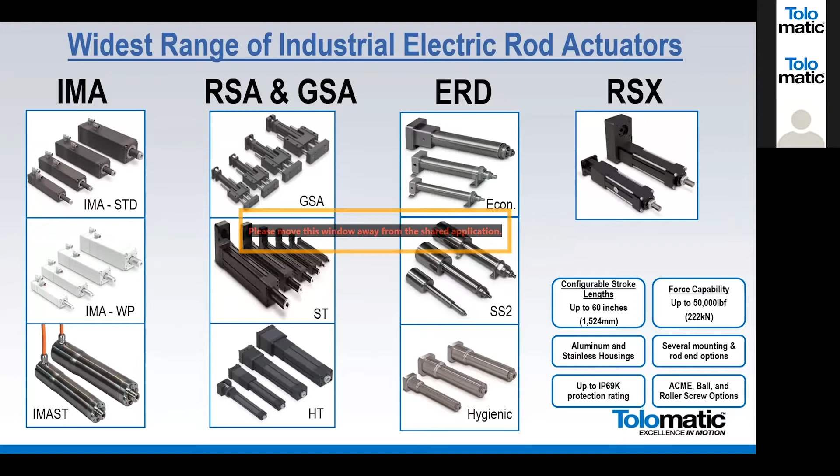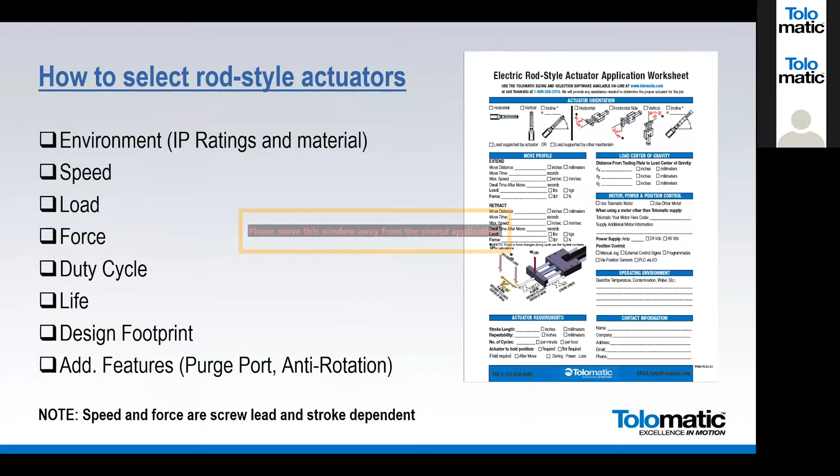RSA series is configurable up to 60 inches of stroke, and the RSA series will also do about 13,000 pounds of thrust, and the larger RSX series up to 50,000 pounds of thrust. So we truly do have an applicable product for hydraulic conversion. Different IP ratings, and of course Acme, ball and Tolomatic roller screw options for the screw technology. Jeff is going to be talking about how to select rod style actuators, and I'll turn this part over to Mr. Brandt.

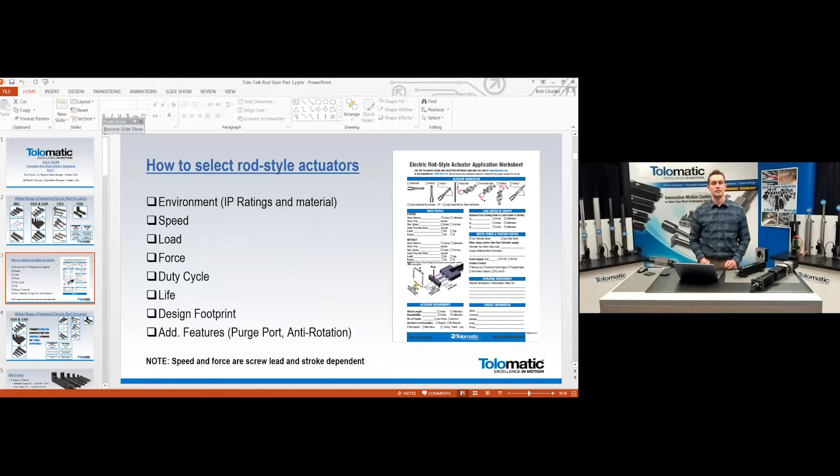Like Bob was saying, there's a lot of things that need to be taken into account when you are selecting your rod style actuator. I know we've gone through some webinars already with this kind of background on selecting an actuator. Please feel free to check those out on our website, the ToloTalks link. But for now, we'll hit the main points here. The biggest determining factor for which rod style actuator you're going to select is probably going to be the environment, looking at the IP ratings and what kind of material the actuator is made out of.

The other thing to consider when you're looking at the actuator is the specs of the peak speed and the maximum thrust capability. Generally, you're not going to be able to achieve both at the same time. So generally with a higher speed, there's a lower force, and vice versa. With a higher force, there's a lower speed. So it's something to take into account, try to figure out that balance. Those will help build your duty cycle, and we can determine from there which actuator will be appropriate for you.

The other thing to consider would be the life expectancy, and we can touch on that a little later on with some of the roller screw options that do lead to a longer life. And then the last thing that I like to make sure of as I'm sizing the application is the design footprint. So how is this going to fit in your system as a whole? And making sure that we're not going beyond any space constraints that you might have in your system.

Yeah, be sure to look also for the Tolomatic sizing helps on the website. We do have some recorded Tolomatic sessions that will help you size actuators, but of course, we're always available to assist with sizing. You can reach out to Jeff or any one of our technical team for assistance in sizing product. We do want to right size the actuator, especially when we're replacing pneumatic or hydraulic applications, as the electric product is more expensive, and we want to be right sized for the app.

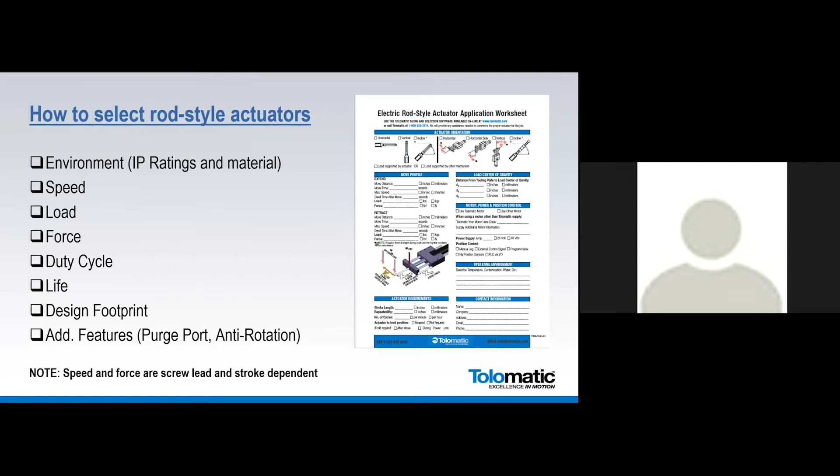So to that point, if you need assistance, this sheet that we have to the right here, the electric rod style actuator application worksheet, is a way to help our team get the information necessary to do a proper sizing. This sheet is available. You can reach out to Tolomatic directly for this, and it's just kind of handy to keep when you're discussing applications with your potential customer there.

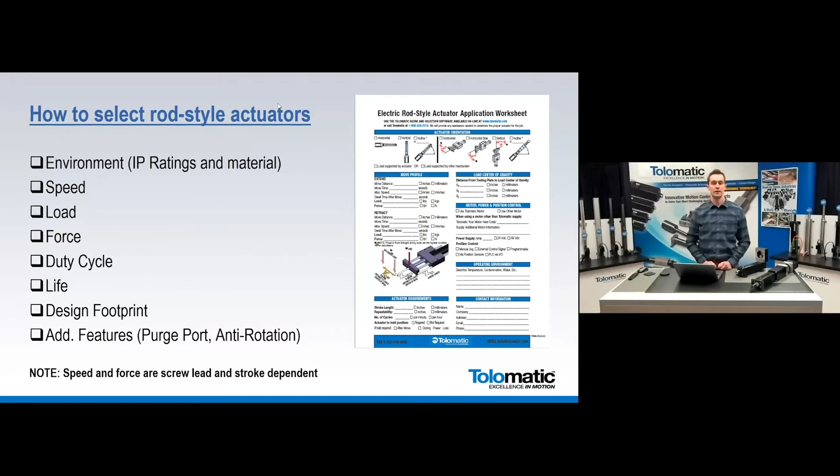And the hope with this worksheet is that, if you do come to a member of our applications engineering team here, where we have a wide support system, everybody should be covered by primary support. And if not, there's always one of us to help back up. And the big thing with the worksheet is if you do come to us, that's the one thing that we ask, is that we have that information from you.

And it also is a handy worksheet to bring along on a sales call. If you're getting into the sales process and starting out, and I guess even for some of the experienced vets, it's a good reminder of making sure that you're hitting all the talking points and covering all the information that we would need. And hopefully, as we can help guide you through the sizing process, maybe it'll make it easier for you on sales calls to start getting a preliminary idea out there as well. Right, it's a great way to be the pro and the real resource to your customer also.

So look for these sheets, and of course all the other how-to and helps that are available from the Tolomatic website. So as we discussed, we do have the widest range of electric rod style actuators, and typically, if you look at the market potential, rod style actuators do offer the highest potential out there for your customers. Growth in rod style actuators in 2021 will probably be in the 7 to 10% growth range, and it's just a great toolkit to have with you when you do your presentations at your customer site.

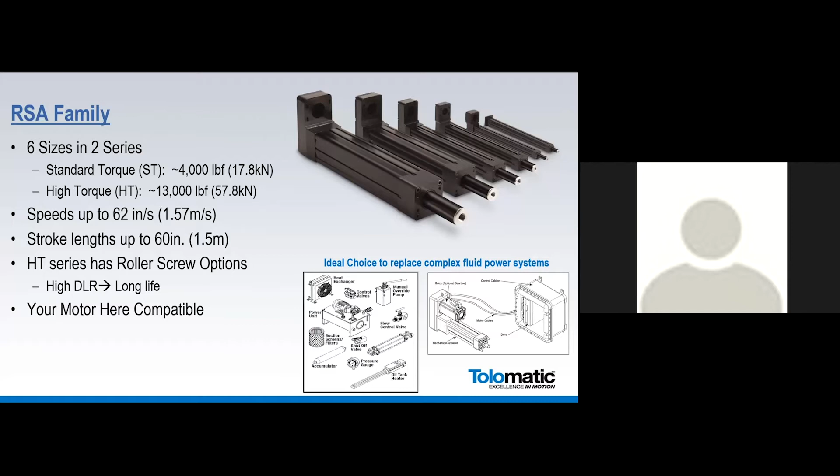So on the website, we do have helps for making that sales argument, and that's all readily available to you from Tolomatic. So the guided version of the RSA is the GSA actuator, available in the 12 to 32 sizes, and then different bearing surfaces based on the application.

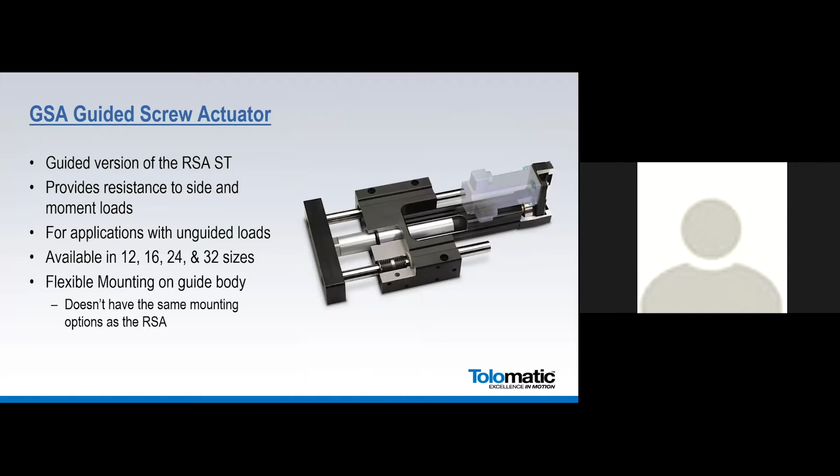And I believe we may have one of these to show, Jeff. Is that on our table here? Yeah, there we go.

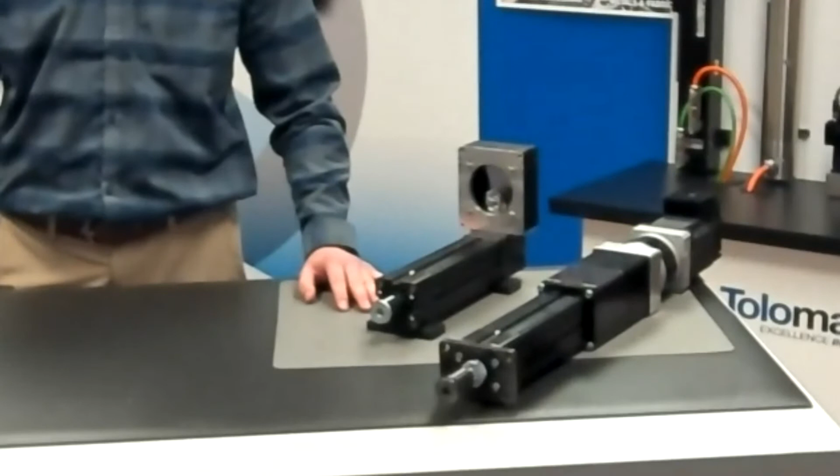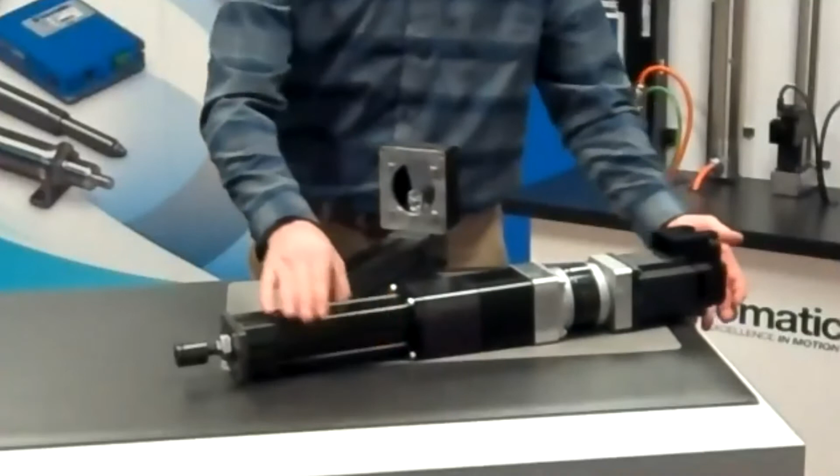So for starters, I just wanted to touch on these two examples of the RSAs that Bob had mentioned. As we get a little closer here, we're looking at RSA 32 for both of these. This shows our reverse parallel or RP mount, and should give you a good idea that these are your motor here capable, as well as this inline actuator, kind of a beast here with a gear head on there, and the ACSI. But again, this should hopefully reinforce some of that your motor here flexibility.

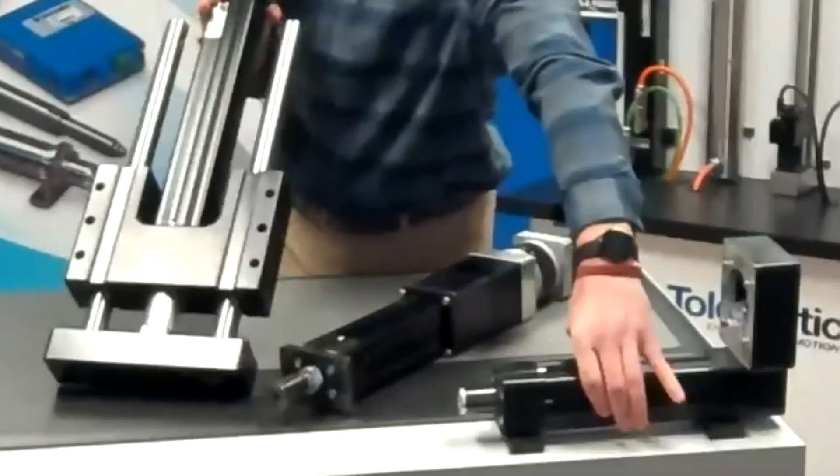And then in terms of the GSA series, I have that here. This is a larger framed, larger size GSA 32. You can see the two guide rods on the side here and here. And as Bob had in the PowerPoint there, these have different mounting options than your RSA series does. That's primarily because GSAs can frequently be mounted with this guide body here on this plate.

There are some threaded holes in here that can be used for mounting, and typically allow for a bit smoother installation when you're integrating this into your system. Yeah, great option for a Z and a multi-axis application there.

And we will. Sorry about the delay here getting the screens back up.

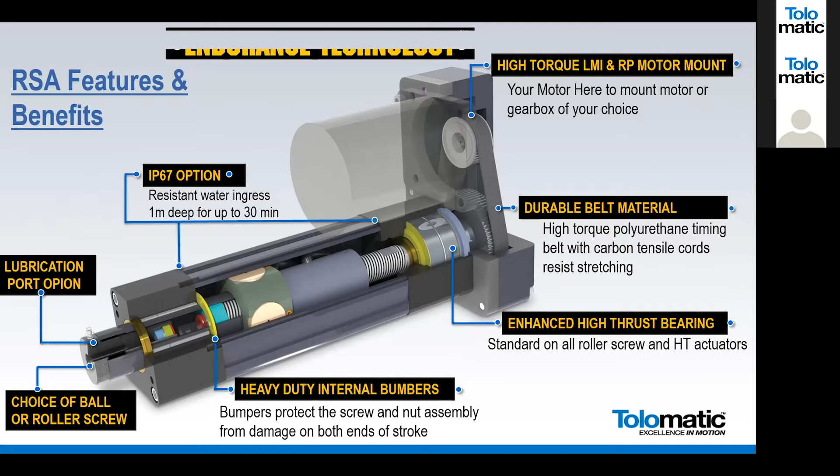And there we go. So RSA features, one thing to remember with the RSA is we do have the grease zerk that is on the front of the actuator for putting lubrication directly into the screw. Very nice to have that option, especially when you consider some of our competitors in the electric market area. They do require disassembly to re-lube. So this does make it very convenient for your customer, and another selling point for your sales argument.

Heavy internal bumpers, and you'll notice the white pucks on there. It does have an internal anti-rotate, which is very nice, not having to worry about adding anti-rotate. The RP version does use either a poly chain or standard belt, and these things are extremely strong. We also use these in the RSX series that we'll be talking about in a couple minutes here.

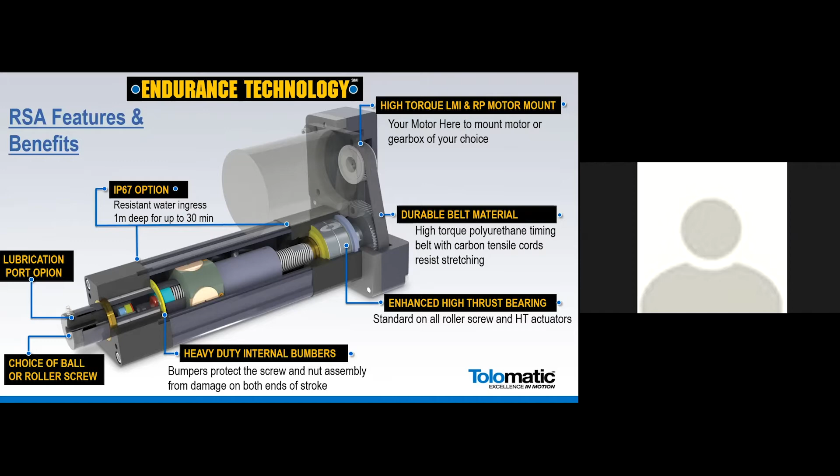And really quick, just to hit on that last picture Bob had up. I know Bob brought it up, but it's something that I really like to reiterate as I'm sizing an application, and that's with the RSA series, that internal anti-rotate is a standard option. It really makes a difference in applications. When we're talking RSA 12 all the way up to the 64, even in the HT series, it really adds.

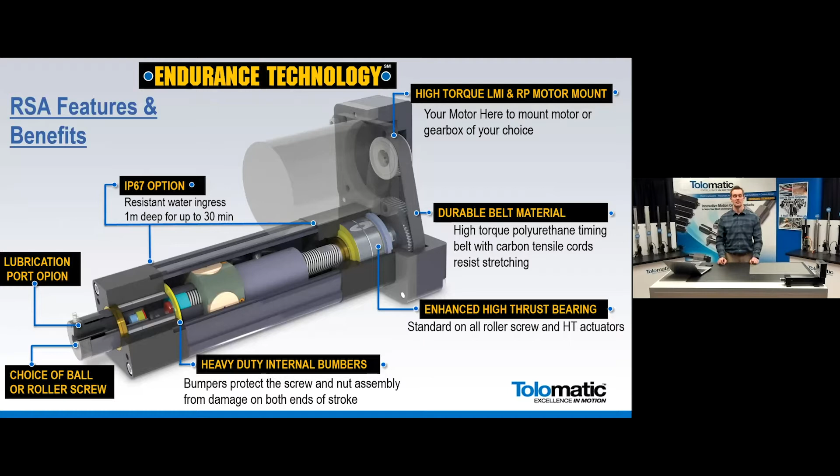It can be a big difference in a sale when you're trying to eliminate external guidance, and it helps clean up and kind of add a little bit more to the aesthetic of the system. Makes it a great press style actuator.

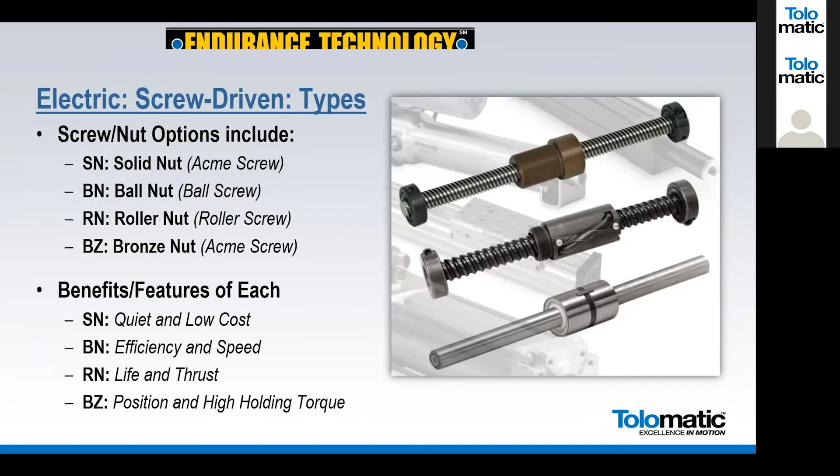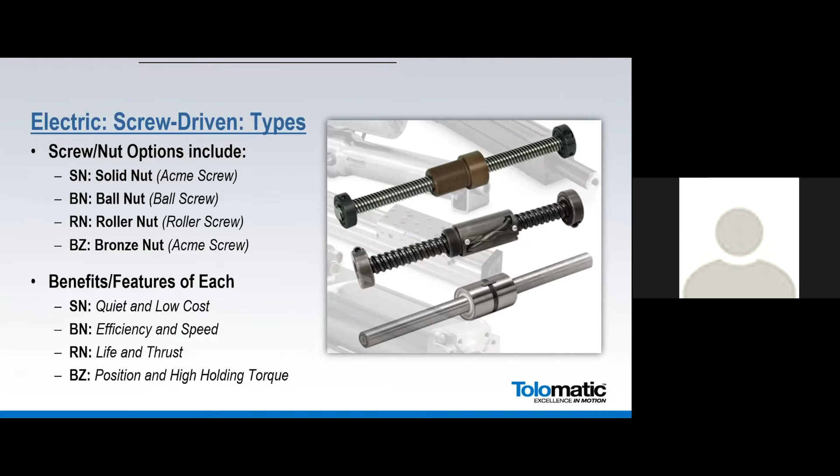So we mentioned that we have several nut and screw options: solid nut, the Acme screw, the ball nut, bronze nut, and then of course the Tolomatic roller screw. Screws are manufactured at Tolomatic, and if your customer does require a roller screw, having the Tolomatic product readily available versus looking at 12 to 20 some weeks to get a screw from some of the other manufacturers is a real benefit. So long life and very, very high thrust for size.

And remember, the bronze nut also, if a brake is not wanted in the application, our BZ bronze nuts are great for low or no back driving. Eliminates the requirement for an electronic brake.

And then just to touch on, Bob had mentioned kind of two of our more specialty nuts. But the ball screw, that is a standard. It's a favorite around here. Long life. It does provide higher efficiency at more moderate speeds.

If you are looking for a lower speed, with maybe a little bit of a lower duty cycle and or a little bit less life expectancy, we can look at a solid nut, like Bob had mentioned. That is typically a quieter nut as well, and if the application presents itself, it's another great option to implement.

Yeah, another great reason for filling out that rod style worksheet. We talk about environment, and that'll help size the appropriate actuator. Nothing's worse than getting an actuator into an environment that might need to be very, very quiet. I think we've all experienced that, and we do have the technology where if we select the right product, we can get a very, very quiet operating system.

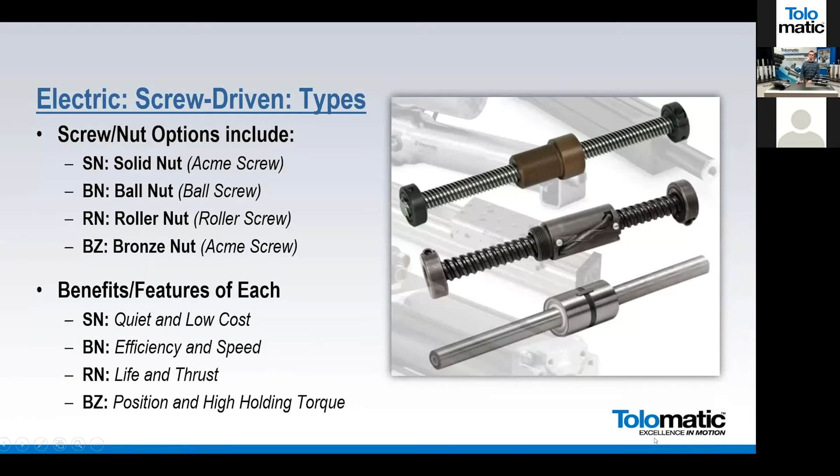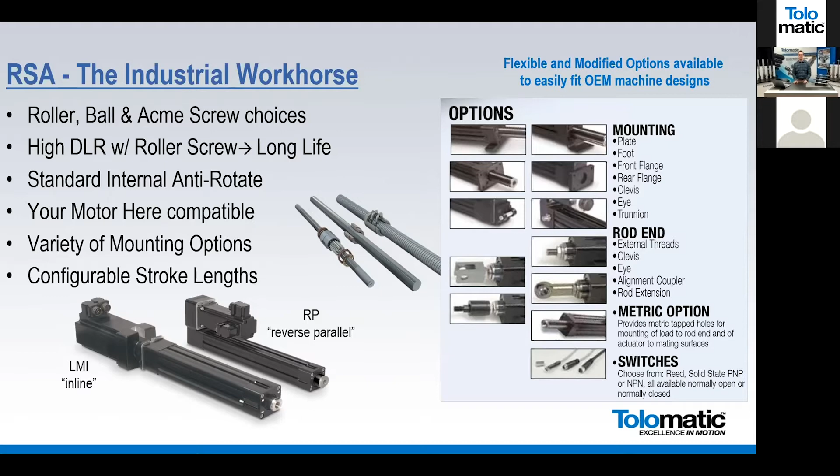Inline and reverse parallel mounting shown there. And again, everything at Tolomatic is configurable stroke length. So rather than having set strokes of 2, 4, 6, 8, we can do 2.5 inch, 2 1/4 inch, whatever the application requires. And of course, the Your Motor Here program, allowing your customer to maintain the controls that they're familiar with. A lot of great arguments versus the competition for you guys to present when we're trying to win new business.

I'll let Jeff, if you want to talk on this, Jeff, the HT option for the RSAs. Yeah, definitely, and I think this is going to be a pretty good graphic to have in mind. If you're out in the field or a customer has a call and they're saying, okay, this RSA looks like it's going to be a good fit. Why do I need this HT? What does that do? So the HT will allow you to have a longer life. We use roller screws in the HT.

The HT series is available in every size, starting at the 24 and up. So we have the 24, the 32, 50, and 64 there. All of those have the HT option, and those usually come with a bit more robust of a coupler or pulleys and timing belt system there, as well as a modified bearing arrangement with high capacity bearings that allow for much higher force. And in addition, some of the more standard YM codes allow for keyed motors and gearboxes with the HT series.

And the keyed motor and gearbox is actually required for the HT series. That's just to make sure that alignment is correct, and to prevent any sort of nightmare scenario with something as simple as a collar clamp or a little more simplistic from a coupling side of things. So the other key selling point, more for a pressing type application, is going to be the grease zerk that Bob had mentioned earlier. It really helps when it comes to the preventative maintenance schedule and relubrication.

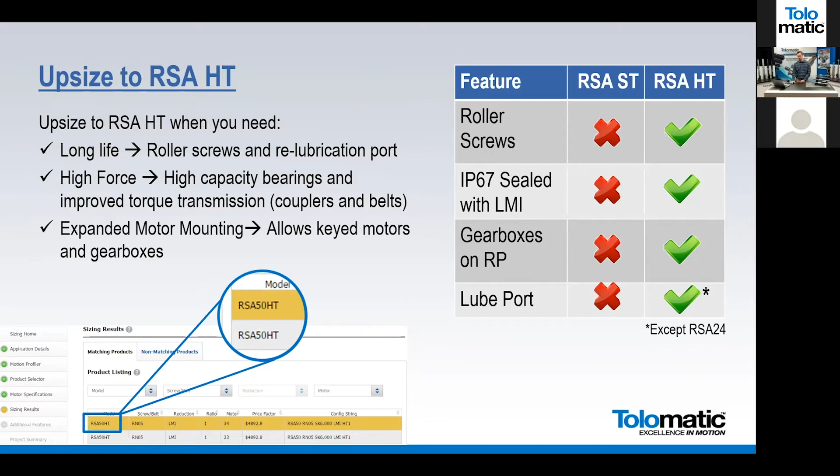And if you are curious at all about what the relubrication schedule might look like, if it is a more demanding application, please do contact one of our application engineers. If it's a press application, there's some different formulas that we can use, and we can look at your application specifically so that we can get you a personalized recommendation, and that should help extend the life of the actuator. Right, and force is available in the RSA series with the HT option up to 13,000 pounds of thrust.

So one of the application wins that was really interesting. We may have shown this before, but because it involves fast race cars it's kind of fun. This is a wind tunnel test for IndyCar type race vehicles, a wind tunnel application for determining downforce and wing placement on the vehicle. We used RSA 24s in this application, and just a great win all around. 115 of these went into this system. Long life, and testing for this type of application is just one of the more unique and interesting apps at Tolomatic.

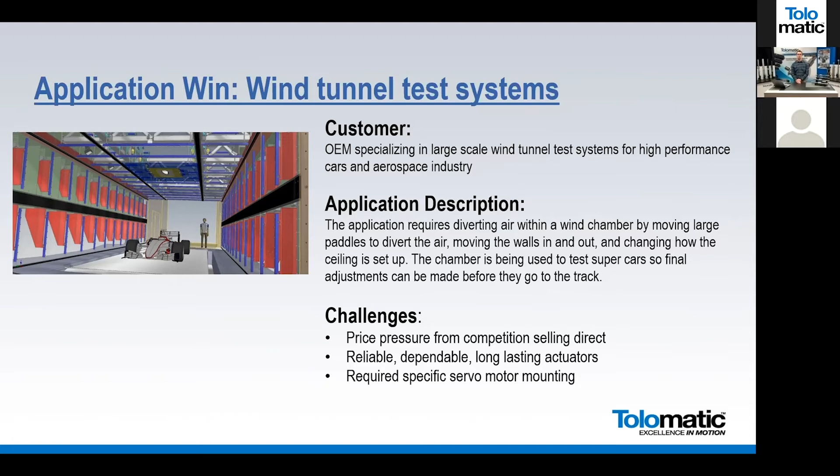So the pricing and some of the other challenges were easily met with the product. We were able to compete with competitors selling direct. We still went through our distribution channel, and just a great win all the way around, and one of the more interesting applications at Tolomatic. We also do these type applications for the aerospace industry, and it's just a very complete system from Tolomatic, and really helped the customer achieve what they were looking for.

And really quick, Bob, if you don't mind, I guess we're still on this project here, but it was kind of an interesting scenario, and we kind of had to work backwards almost with this one, because they had a specific servo motor that they were wanting to continue using, and that's where our YMH program came in handy. We were able to match that up directly, and we kind of worked backwards, sizing an actuator to fit the motor that they had. So it kind of shows some of that flexibility that we can provide with the YMH program. Right. Very good.

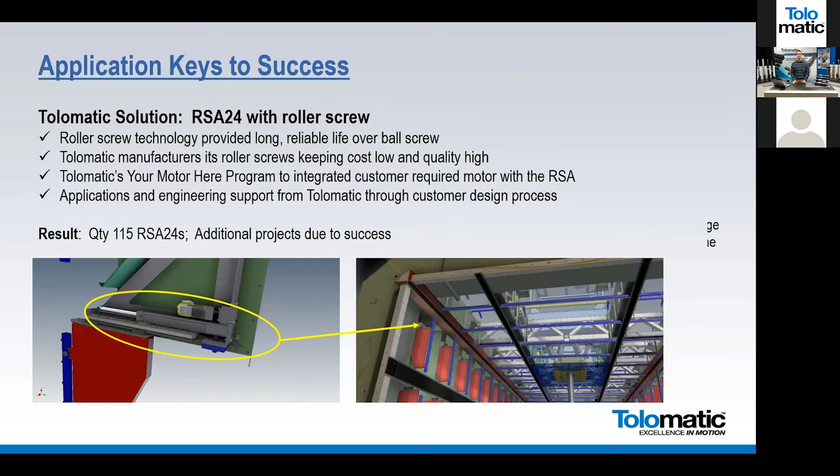Another application in the food industry: walking beams are typically hydraulic. Nobody really wants hydraulic fluid, even food grade hydraulic fluid, on their food in general. Just not a nice thought. These applications seem to be moving quickly to electric applications. In the food industry, typically the standard RSA isn't one we would recommend, but this was away from the food product itself, and provided just a great solution for this meat processor.

The walking beam kind of pulls and slides the product through various stages of dressing in the chilling process, and the nice part about the electric actuator in a cold environment is you don't have the sluggishness that hydraulics are subject to in the cold. So there's a lot of good argument for electric applications in the food industry, especially in cold or in high heat applications. You have consistent movement, and you're not subject to the variations experienced with hydraulics.

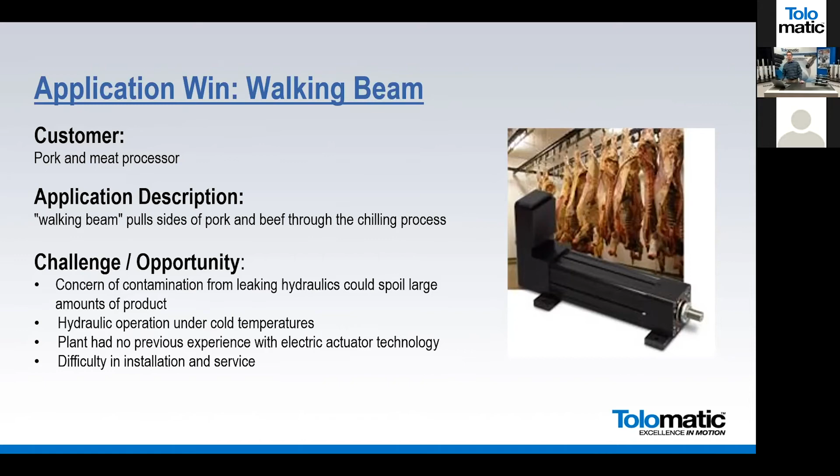So it's interesting when you have a customer that allows a beta site test. This application enabled us to do that. We work with our distributor directly with the customer, and we're able to supply them with an RSA HT. It eliminated the hydraulic leaks, contamination, all of the maintenance and operating costs that go with that.

The ability to work with Tolomatic on a modified standard product allowed the actuator to fit in the footprint of the existing hydraulic system. And of course, we appreciate the local distribution partner support and the Your Motor Here program. So you can see the result down there, quantity of 100 actuators sold. Very, very nice application and great Tolomatic win.

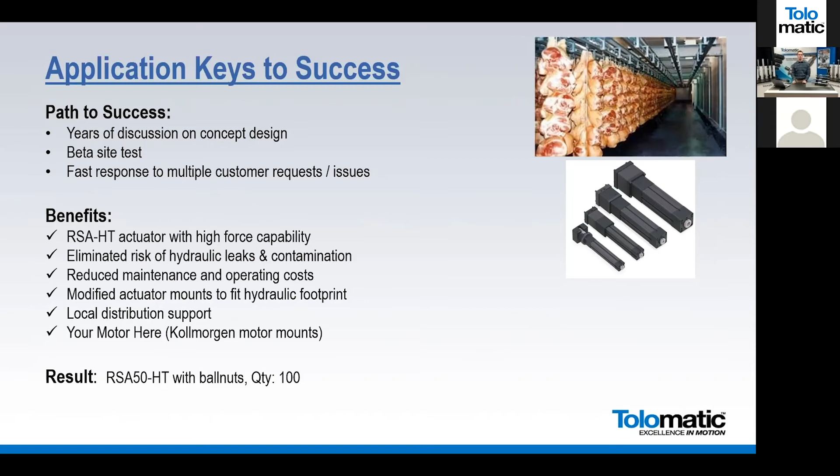And I think that application really showed a good idea and representation of the support that Tolomatic can provide. That was an application that took, this wasn't a short sales cycle of 1 month. This was a bit of a longer sales cycle. There were some iterations, there was some working through.

And again, Bob mentioned the YMH program, and I know you guys are probably sick of hearing that. It sounds like we're a broken record, but it is something that can make a difference in the sales process, allowing that customization and really kind of helping through that iterating process.

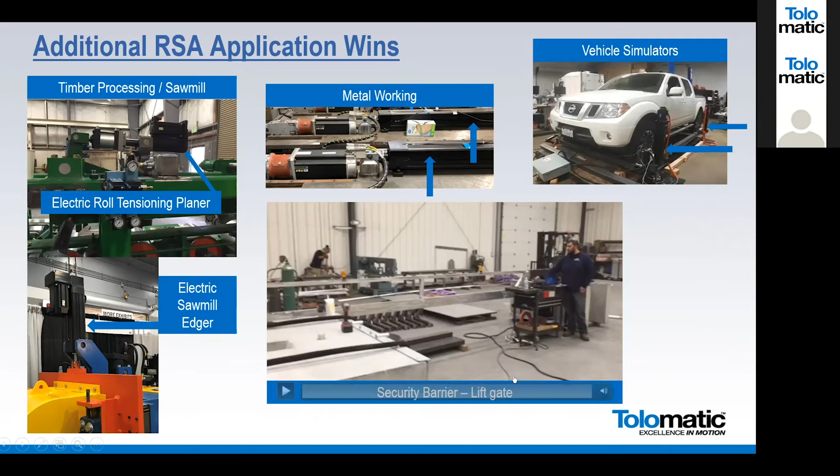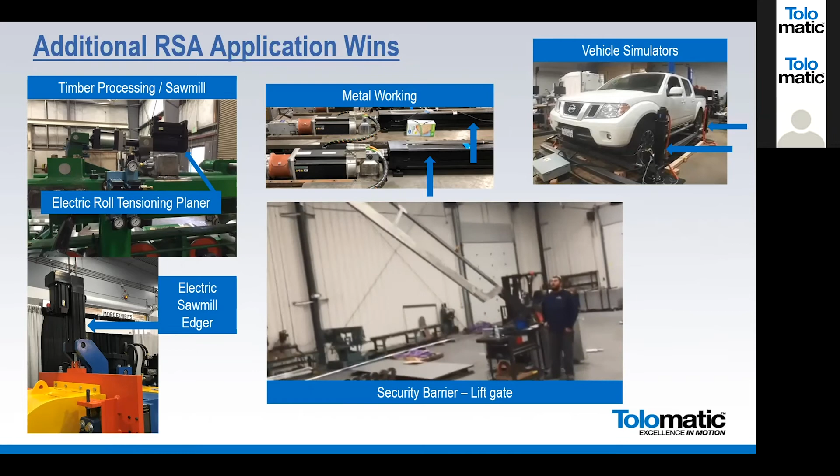Right. Some of the additional applications that have been great wins: timber industry, metalworking, metal forming, tube bending type applications, security barrier lift gates, vehicle simulators in general, a very good application for RSA. In the security barrier section here, we do have a video of the lift arm here. That's a typical application in the security industry, and a great hydraulic conversion application. Jeff, do you have anything you wanted to add on that one? Oh, I think that was good.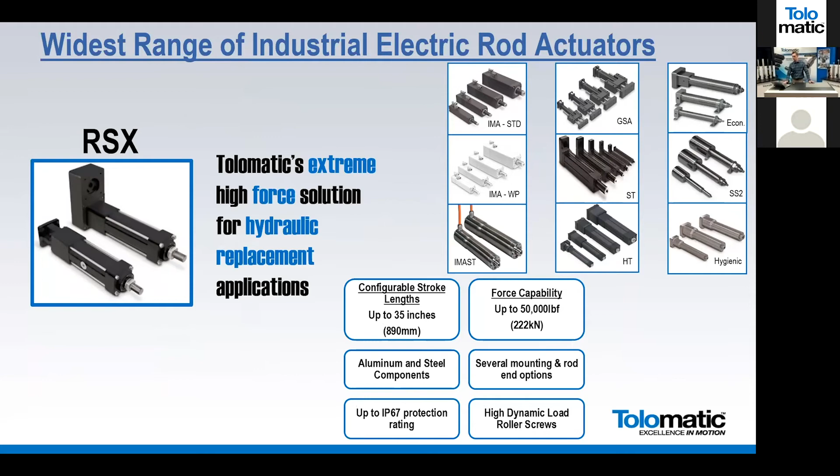Yep. So moving to the next series, the RSX, which has true hydraulic force capabilities, up to 50,000 pounds of force. This is Tolomatic's extreme high force hydraulic replacement actuator, aluminum and steel components, again IP67, very high dynamic load ratings using Tolomatic roller screws, and a variety of mounting options for the RSX. This one is just a beast of an actuator.

You can see from the graphic on the screen right now, roller screw technology. We do have breather ports, purge ports in the system, and of course a lube access port for re-greasing the screw.

In the high force systems, when you're sizing, and Jeff can probably expand on this, heat is a real issue here. So when we're pushing very, very high forces, the amount of contact on that screw from the roller screw is substantial, and heat is generated. We've done a lot of testing at Tolomatic with our roller screw product, and when it comes to sizing these actuators, you definitely want to get our team members involved to help you out.

Jeff, do we have a sample of one of these available to show? Yeah, we do. And if you want to stop sharing this, hopefully we'll give an idea of the scale of this unit. I was trying to be a little sneaky here, and as Bob would come, I'd already have the demo up, but I think this is maybe a little bit more to give you a better idea of scale.

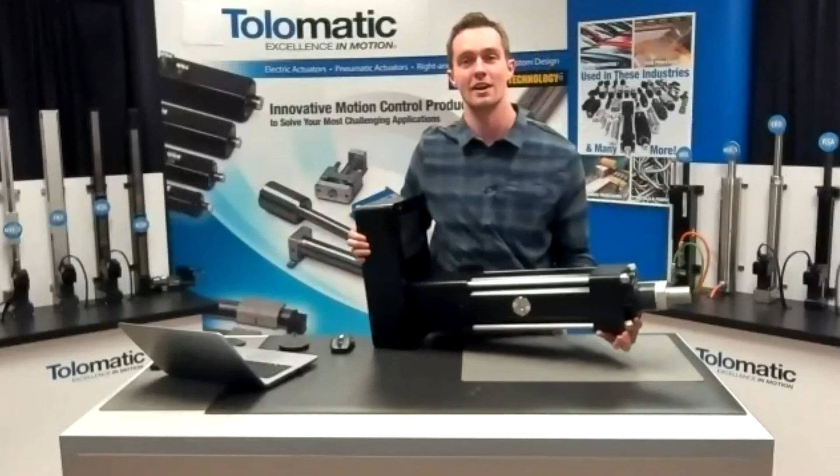This is one of our RSX units. You just want to show everybody how strong you are. This is a joke, I'm making this look heavy. All the guts are out of this, but this should give you just an idea of the sheer size of this unit that we have.

And like Bob had mentioned, it is very, very important to work with us when we're sizing this. Again, this is another instance where we can come up with more personalized relubrication recommendations based on your duty cycle, based on the force that you're using. And we can look at the thermal limits, which is going to be the most important thing for these RSX units and for a unit of this size.

As Bob had mentioned, we do have the purge port and the lube port here on the side for easy access for that relubrication. Because the thing is a mammoth, and reassembly and disassembly is not recommended outside of Tolomatic. So we wanted to make it easy for your customers to relubricate, and this feature does a pretty good job, and I think it helps separate Tolomatic actuators from some of the competition.

It's also a terrific sell too. You get an OEM that's purchasing several of these a month, and, well, let me put it this way: it'll make your sales manager very, very pleased when they see the numbers come in. They're very effective for your end customer. Just an all-around terrific product. It's been a great tool for Tolomatic and for our customer base.

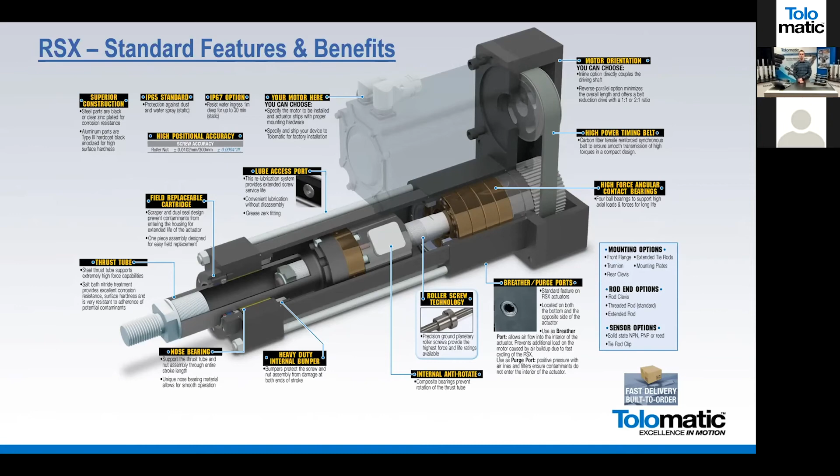We have great tools and sales arguments for replacing hydraulics on the website, and we can help you out. All the RSMs, regional sales managers, and our technical team can assist with this process. Because the actuators are expensive, we do want to make sure these are right sized. And again, the Tolomatic team is very proficient in making sure your customer gets the right product.

So we do have 3 sizes, 4 models of the RSX: the RSX 80 and 96, and then the 96 press model. The difference with the press model is it is actuation at force in one direction, either press or pull. So same size actuator, 30,000 versus 40,000 pounds of force, but it is not bidirectional. It's a single direction application. So perfect for hydraulic press or C-frame press type applications.

And then of course the RSX 128, which is just a behemoth of an actuator, but a true 50,000 pounds of force available. So again, using the Tolomatic roller screw product, all manufactured at Tolomatic. Configurable strokes, a little bit shorter, up to 35 inches, and of course your motor here compatible.

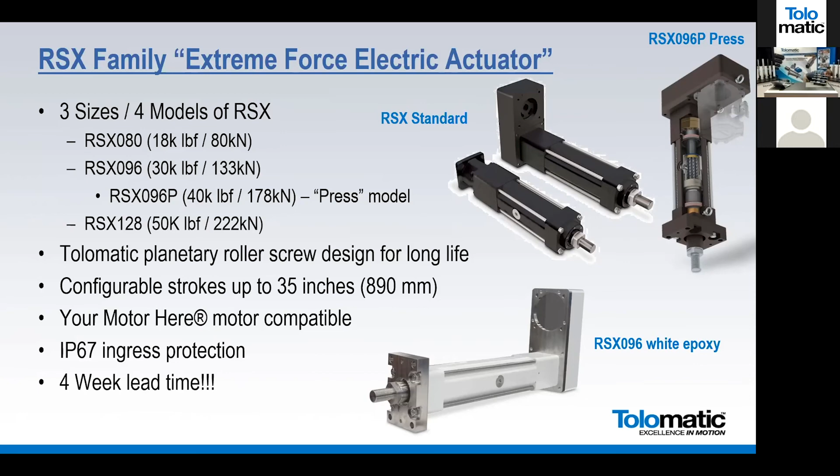Then the RSX96P, this unit has been out for a while, as we mentioned, single direction, terrific for C-frame presses. Just a terrific product for aerospace, any pressing application, pressing fasteners, that kind of thing. It's just a very, very effective tool for replacing hydraulics.

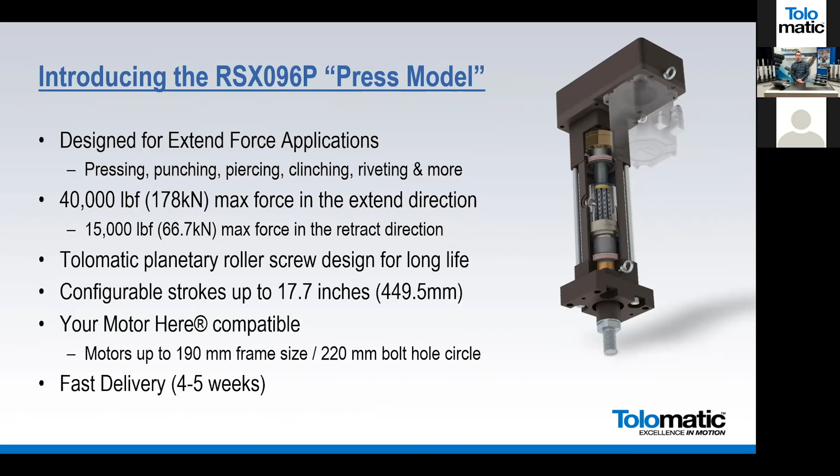And then, of course, the white epoxy version we discussed. And another application win using RSX actuators. This is the automotive industry, and it was actually for press assembly of brakes. And I think we can say that it was used on a pickup truck, one of the more popular pickup trucks sold in the United States.

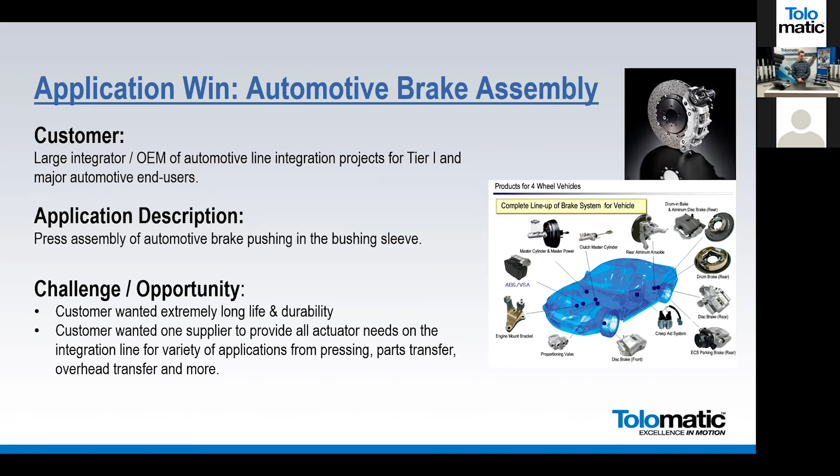Customer did come to Tolomatic, which is a real winner. Right now, it's a little bit strained with the COVID issue. Hopefully, we're through this soon. But every time we bring a customer to Tolomatic, where they can see our people, how we work, it is a great tool to consider. So if you do have an application where we need to instill confidence in the customer, that's a great way to do it. Bring them to Tolomatic, meet our people, see how we build the product. It's a very effective tool in winning the sale.

So the benefit was the roller screws with our extreme durability, the highest dynamic load ratings in the industry. Customer, because of the need for long life, was willing to pay for a larger product than the force that was required, but it did work out very, very well. And of course, the Your Motor Here program made it a great win. And along with that, we were able to pull in other Tolomatic products, our ERD, RSAs, the rodless actuators, MXB and B3Ws and MXPs. So just a terrific win all the way around.

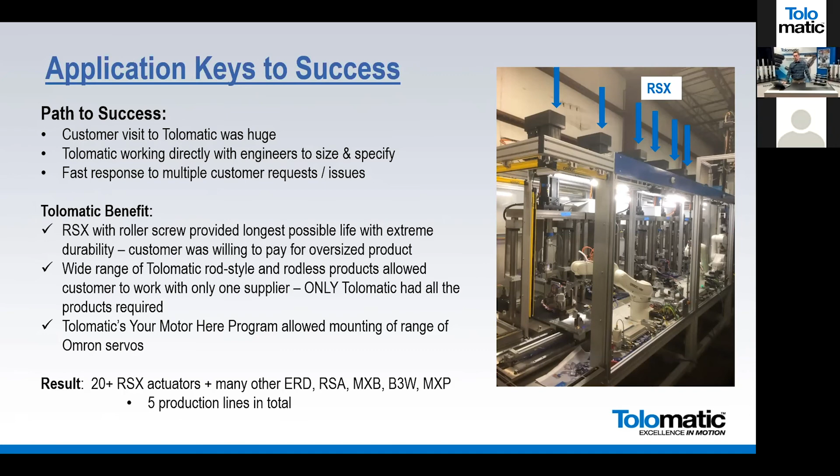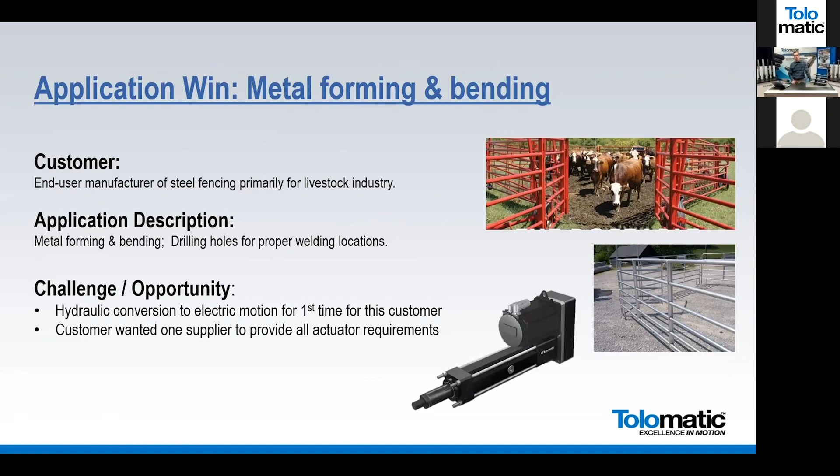So another one, we work in every industry. This was a company down in Texas. They do metal forming and bending. Their primary business is selling fencing for the livestock industry, and very, very effective, changing from hydraulic to electric actuators. And again, the sales process and the benefits of the RSX definitely won the day there. And again, we were able to pull in additional Tolomatic product for the application.

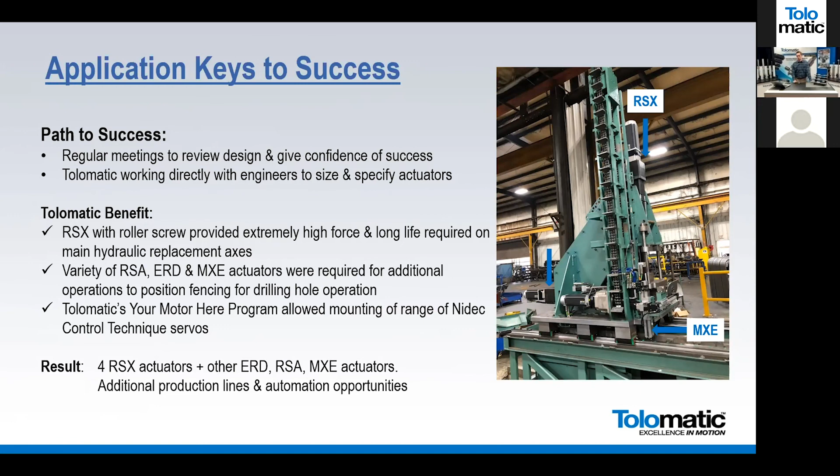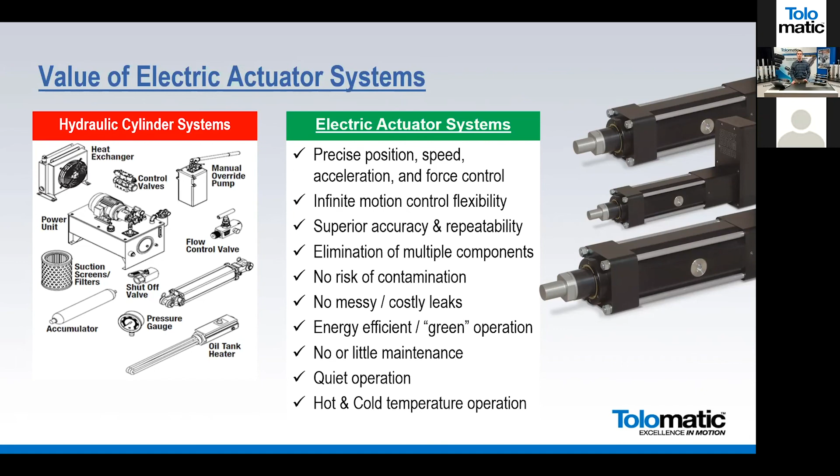Jeff, you have anything you wanted to add here? Because I think we're about over time right about now. Yeah, I was just going to say quick, again, that was, I think, a good overview of kind of that comparison there.